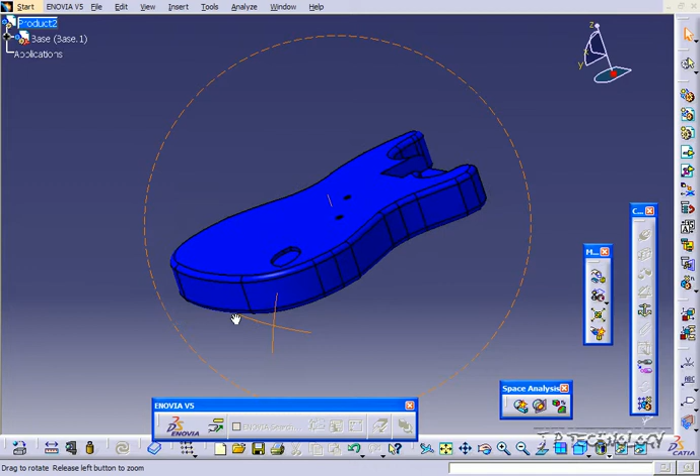So to start off, let's bring in a few parts. Click Insert, click Existing Component, click Product 2, and let's insert the base. Click Open, and we've brought the base in. We're going to be using this as our base, so we're always going to be selecting the other part first and this part second.

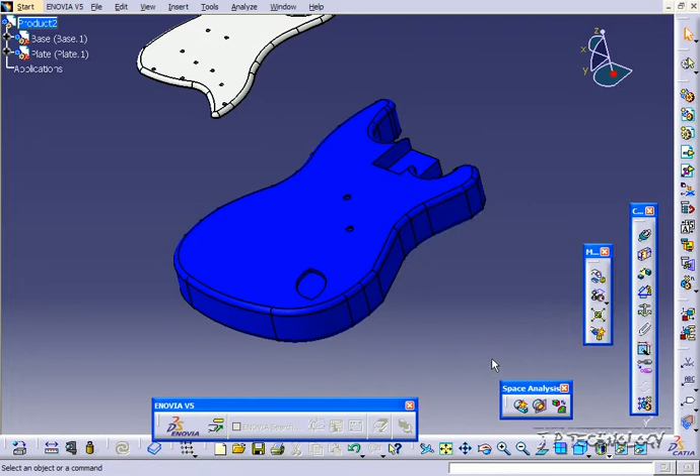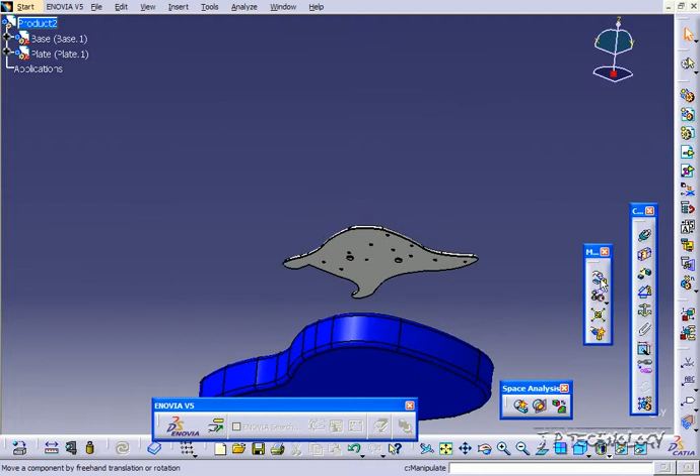Now let's bring in the plate. Click Insert, click Existing Component with Positioning, click Product 2, click the plate, click Open, and just move it around a bit. Click OK. We're going to line up one of these circles and position it over here. Let's click the snap feature and snap this axis to this axis here, and it's the right positioning. We'll do the snap again and position it on this face. Now we've snapped the plate onto the base.

Let's bring in a couple more components: click Insert, Existing Component with Positioning, Product 2, and this time let's click the knobs. Bring them in and move them around so you can see where they are. Click OK, and let's position the knobs on these three holes here.

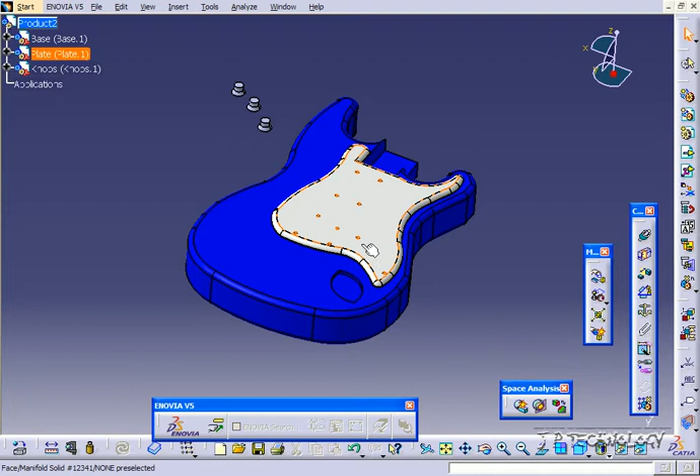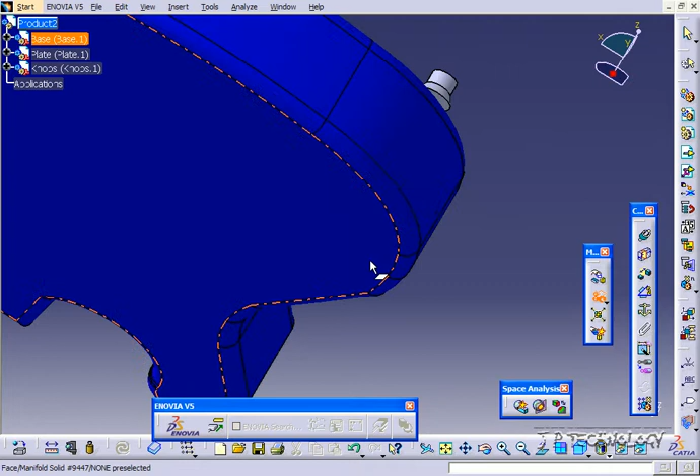Again, like the other ones, these knobs are already created as one part, so all I need to do is line up one of them, and they're all going to be lined up correctly. Now we'll snap the faces: snap this face here onto this face here, and now we've positioned our knobs.

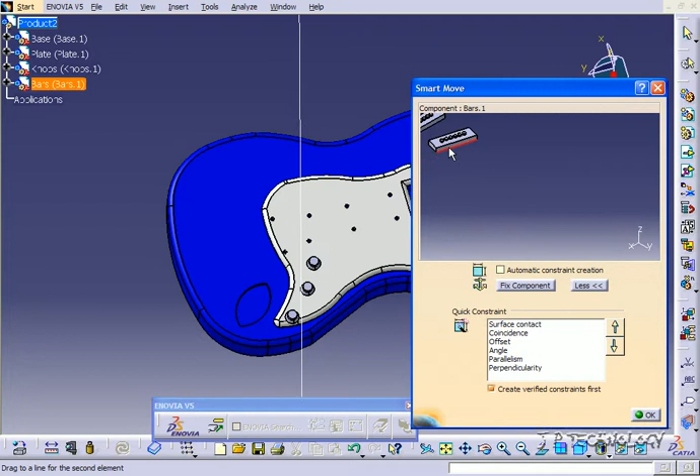Now let's bring in some more parts. Click Insert, Existing Component with Positioning, click Product, and we'll bring in the bars. Click Open, and just move them around so you can see them. Click OK. Now we'll click the manipulation, so snap these bars.

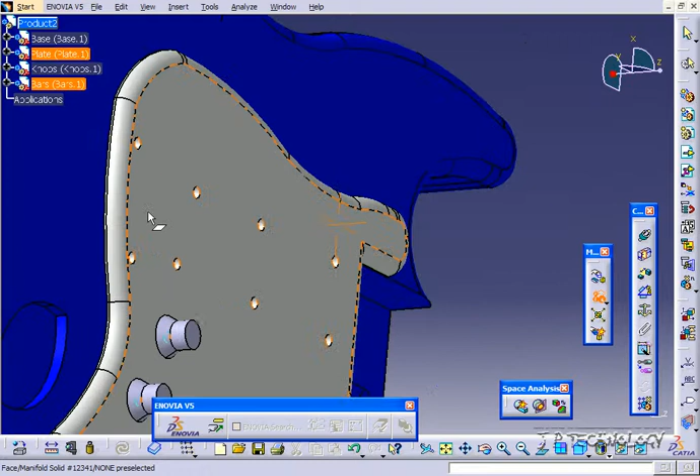I'm going to click this one there - or wait, let me go back, we didn't select the axis. So select the axis there, and we'll select the axis here. Click OK, click outside, and now let's snap the faces together. Click this face, and click this face, and now we've snapped the bars on.

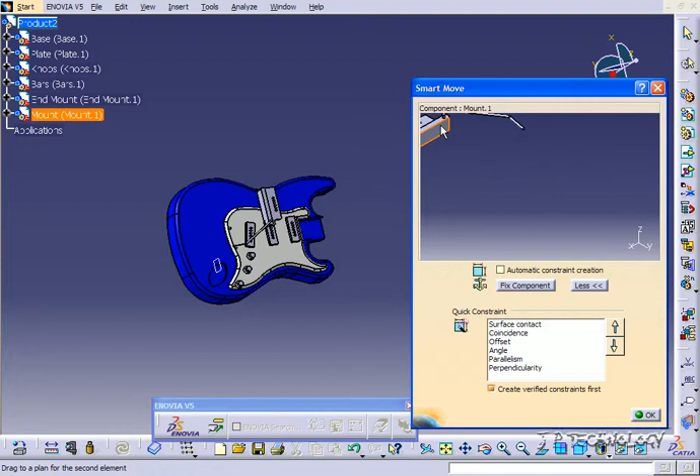Now let's insert another part. Click Insert, Existing Component with Positioning, click Product, and let's click the end mount, click Open, click OK. We don't actually need that one right now, we need the other mount. So click Insert, Existing Component, click Product 2, click the mount, click Open, and just move this around. With the end mount, just leave it there for now, and we'll position everything after.

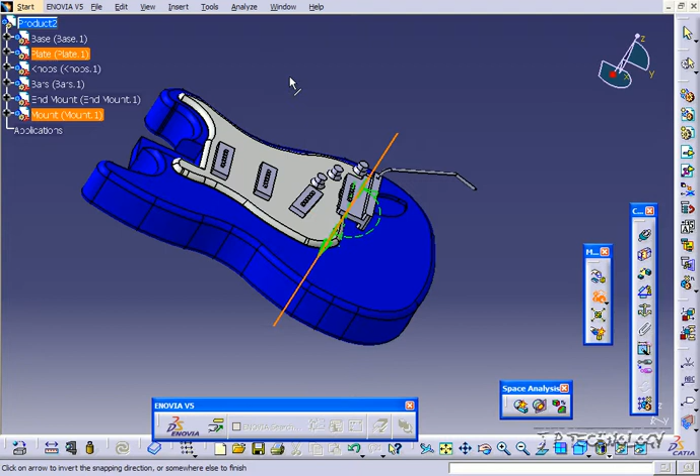Click the snap, and let's choose the axis here, and we'll choose this axis here. Click outside, and now snap the faces: click that face there, and that face there, and now we've snapped that down.

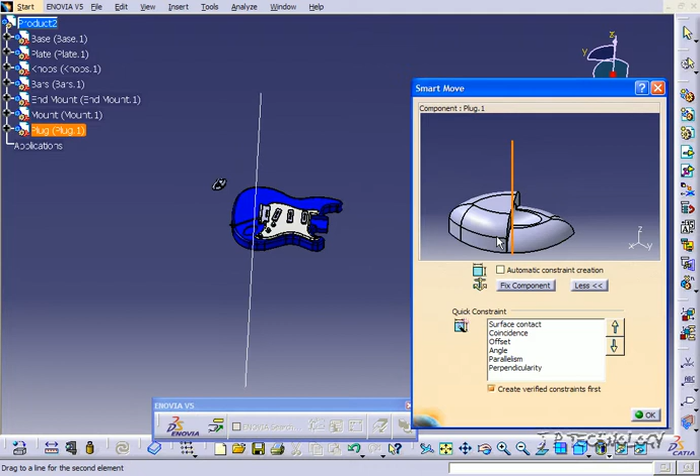Now we'll insert another component there. Click Insert, click Existing Component, click Product 2, and in this one let's insert the plug. Click Open, and move it around so you can see where it is. Click OK, and let's snap this. We'll click Snap, and click this face here, and click this face here, and now they're in line.

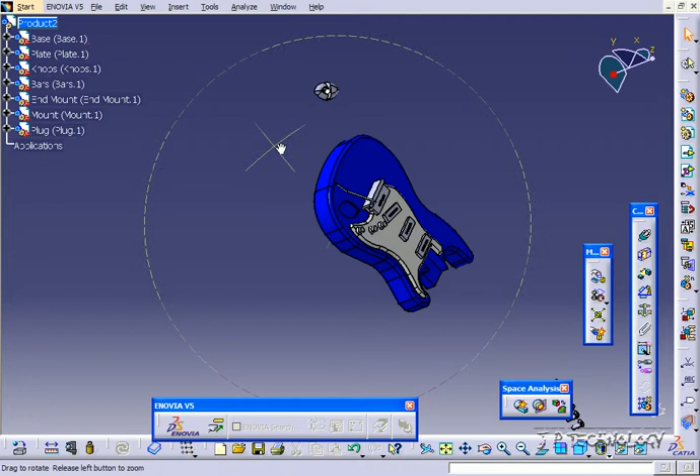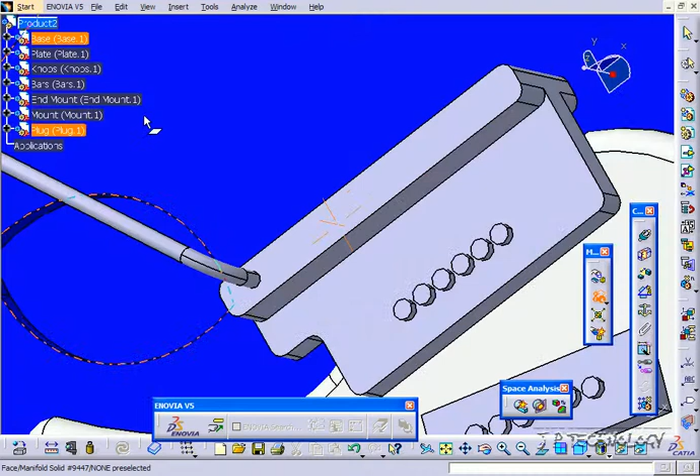Now we're going to snap a point. Click the snap, and we're going to choose that point right there, and we're going to snap it into here. Click that point there, click outside, and now we've snapped that component in.

Now we're going to bring in the neck, so let's insert it. Click Insert, click Existing Component with Positioning, click Product 2, and let's bring in the neck, click Open, move it around a little bit, and click OK.

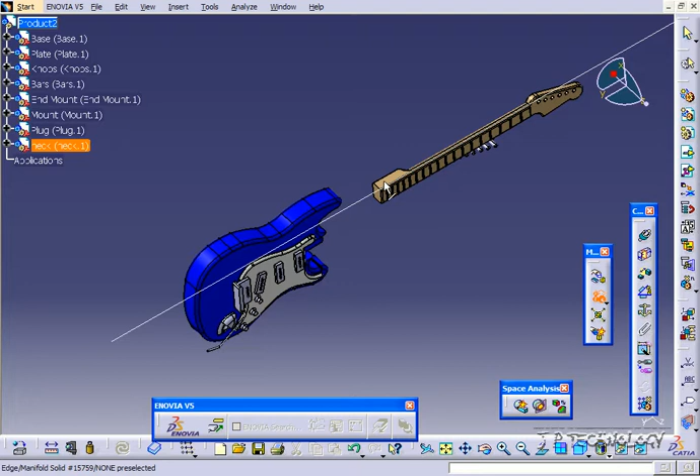Now click Snap, click this face here, and click this face here. Click Snap again, and we'll snap this face here with this face here, then snap this face here and this face here.

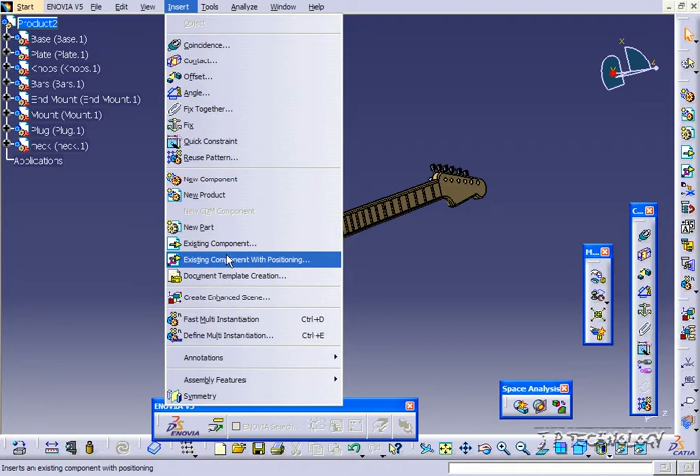Now let's bring in the strings. Click Insert, click Existing Component with Positioning, click Product 2, click the strings, click Open, and click OK.

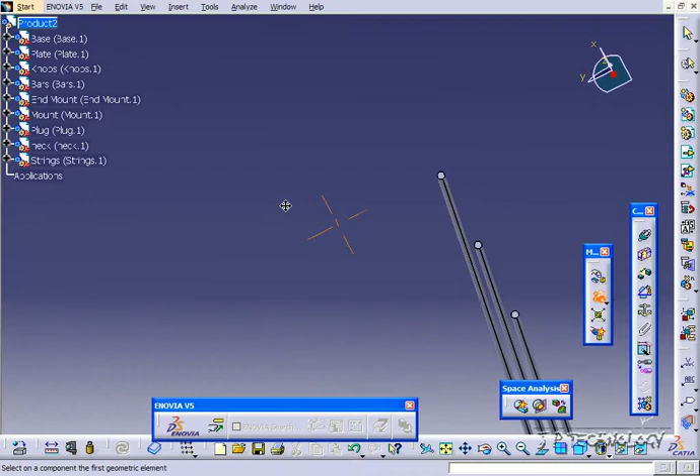So now we have the strings and the end mount that we have to position. Let's position the strings right now. Click the snap, zoom in, and just touch one of the faces of the strings, then click this face here.

You see that it's going in the wrong direction, so we're going to have to flip it, and now we have it going in the right direction.

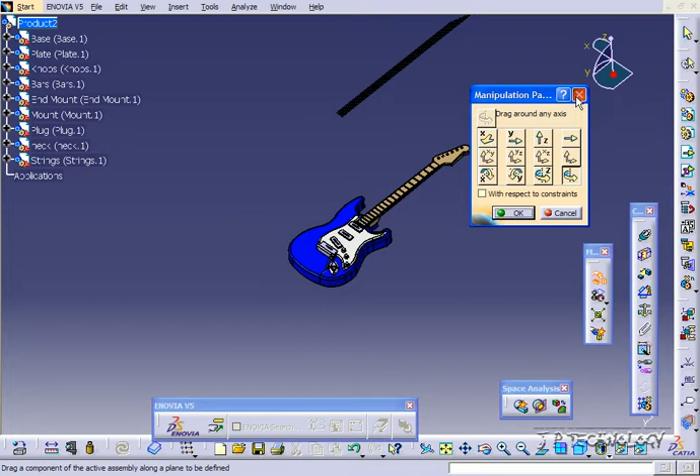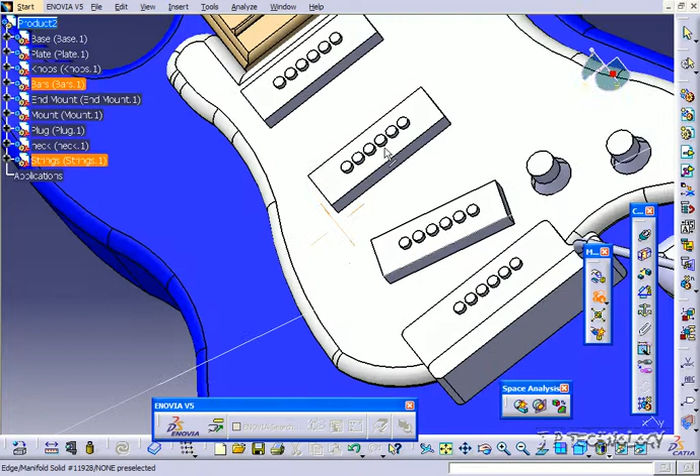Now we'll click Snap again, and we'll choose one of the strings, and we'll click one of these circles here to snap it to.

So now we have our strings in line there, and now all we have to do is position it. We're going to click the manipulation, and we're going to drag it along any axis. So we're going to choose this axis here, pick it up, and just drag it.

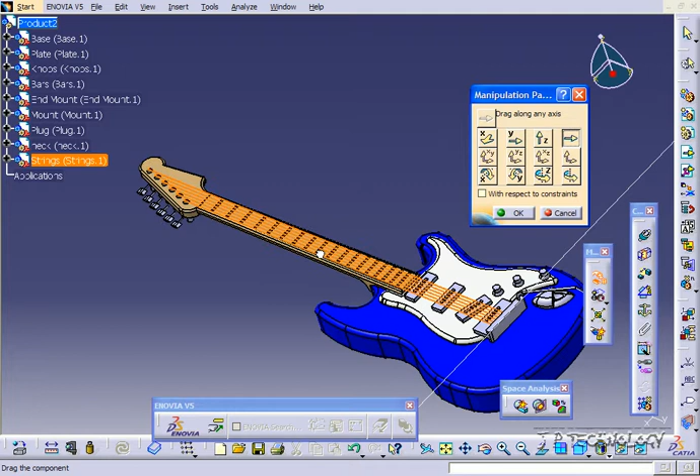Now we're going to leave it where it is right now, just drag it wherever you think it should be, and then we're going to bring these guys up and position it. Click OK.

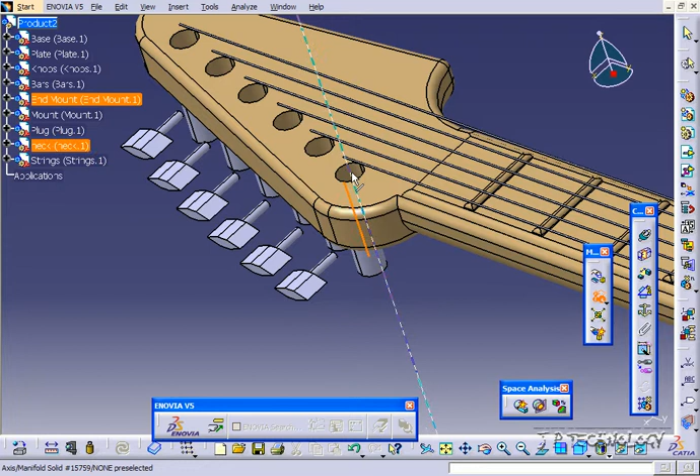And now let's snap these guys in. Click Snap, click this axis, and then we'll click this axis here, snap it, and we have it in the right direction.

Now we'll click Snap, and we'll click this face here and this face there, and we have it going in the right direction. Click OK.

And now if we look at our strings, they're a little bit too far to the left, so what we're going to do is click the manipulation. Now we're able to use the X axis if we wanted to, but in this case I'd rather not.

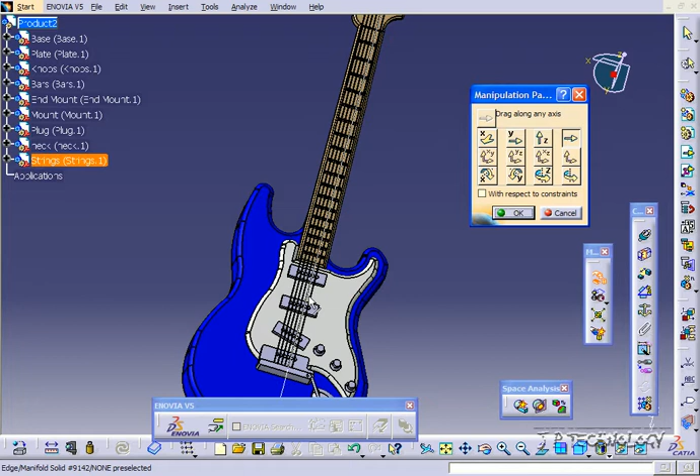Instead I'll just use one of the components that we threw in here and just use one of the lines as an axis. So click that line, and then we'll go up here and just drag the strings over to the position that looks correct and lines up, and click OK.

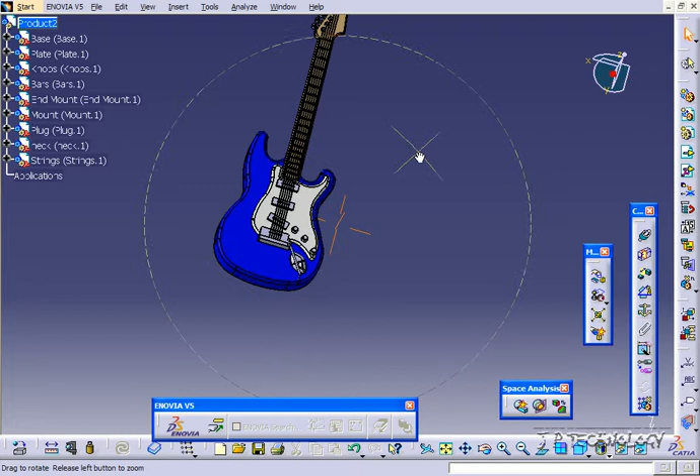So now we've created the guitar assembly using only positional assembly features, so we don't have any constraints on the side. It was much quicker than using the constraint assembly features, and we still get pretty much the same degree of accuracy. So this was just two different ways to look at assembling the guitar.

Going through the process, you're going to learn how to bring all these components together, how you want to piece them together, and this was just two different ways of looking at one problem. With CAD systems, that's how it always is—one problem has an infinite number of answers, so this is just two different ways to look at it and two different ways to set it up.

But for the most part, this was an example of constraining an assembly and positioning an assembly, and these are the two results we get. And that concludes our tutorial on the guitar positional assembly within Catia V5.